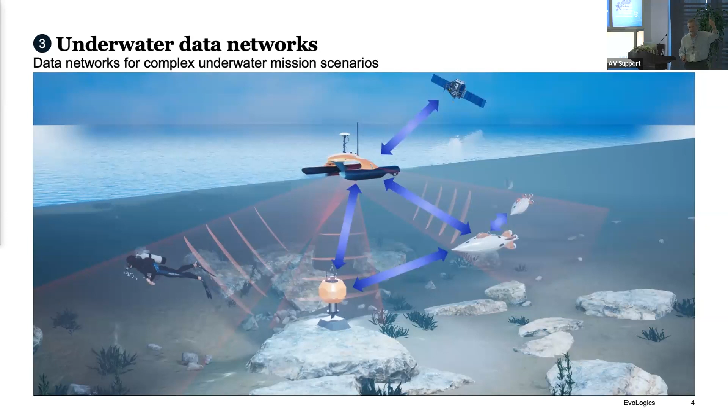We have a wide range of different modems now. These are commercially available. Many of you know that. They give us a possibility to interconnect robots underwater, stationary systems to surface systems, and we also have a communication system to the satellite, and we can communicate to ships and also divers. So the complete network configuration.

But these modems are becoming more and more clever. We have powerful processors on board, so they can do a lot more jobs. That is a big advantage of these singing modems derived from the dolphins. We call it S2C, sweep spread carrier technology: we can use the same signals with modulations on it for reliable communication and also for positioning. We can measure the travel time with the highest accuracy, and we can do USBL, LBL positioning with that.

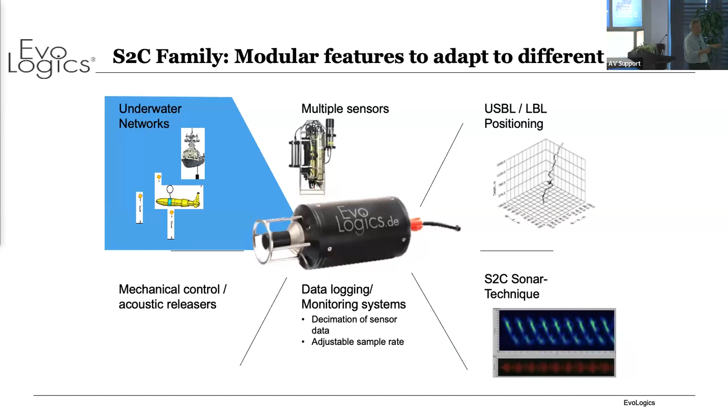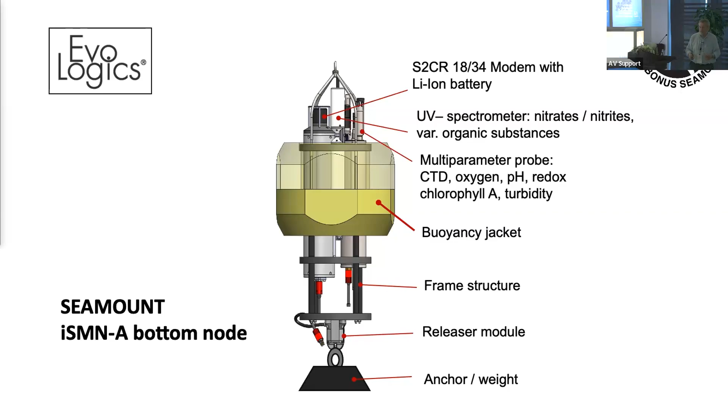We can connect sensors to the data logger. We have a memory on board, mechanical control, and you can set up networks. And with this capability, we said, okay, when we have these LBL beacons for positioning, or USBL positioning, then we can add some sensors. We can integrate CTDs and all these oceanographic sensors, multi-parameter probes, and use them as a multifunctional device. And that is very useful.

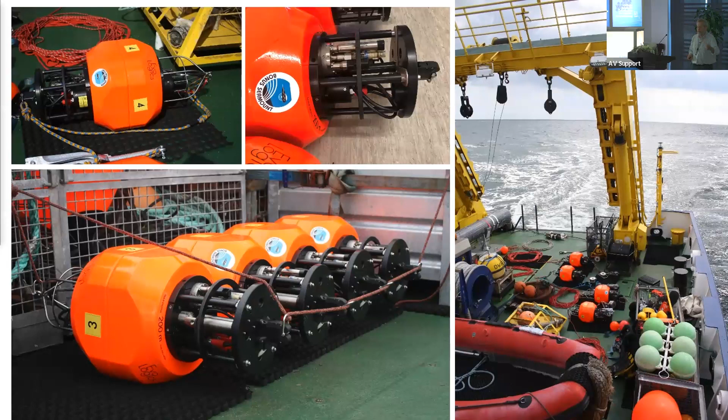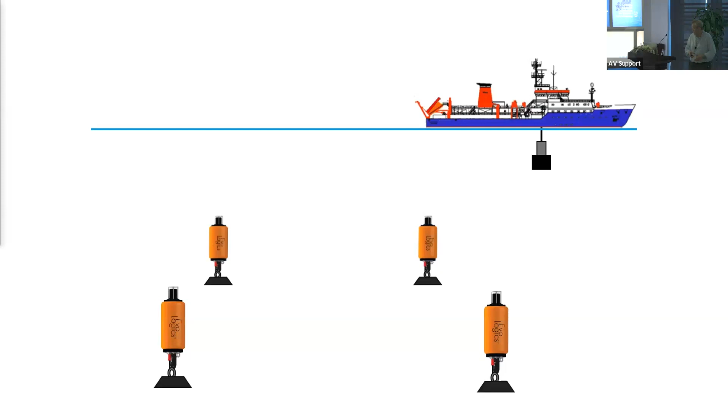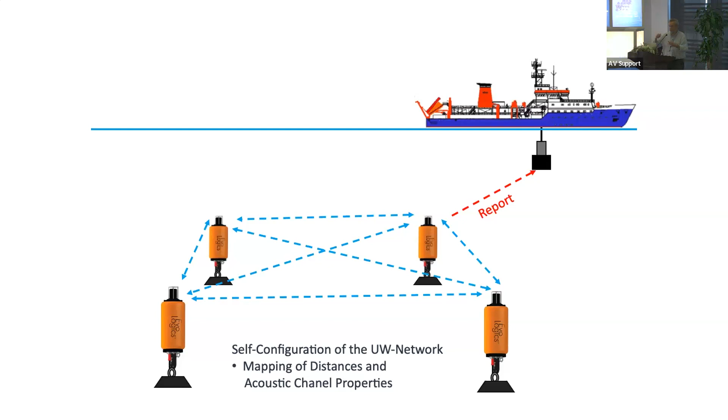That was in a project we called Seamount, to detect sources of fresh water in the ocean, where the water comes out, the springs underground. So these were the beacons for that, and I will show you the deployment scheme. We put a lot of effort into making it intelligent. You can drop these stations to the bottom. Then you can send a trigger signal. They automatically interconnect. They measure the distances between the stations and also the acoustic properties of the channels. And they send you back a report that's shown directly on the map.

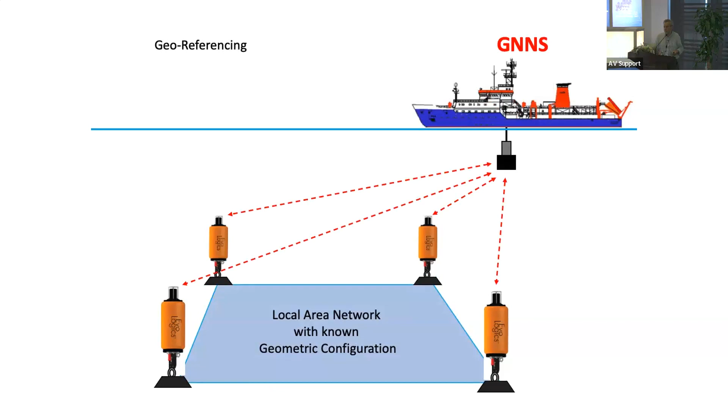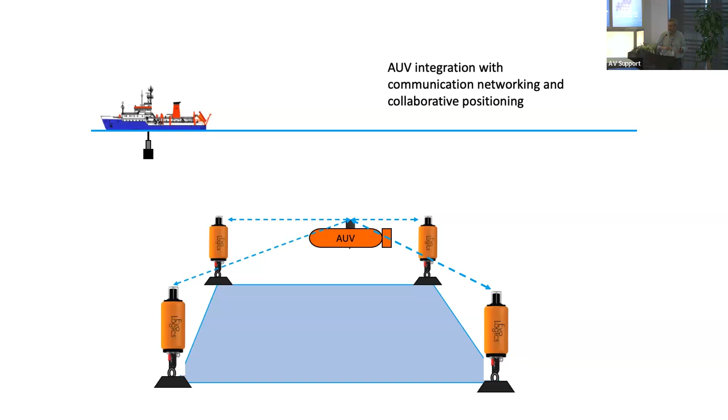And then you have the possibility to use GPS and/or GNSS from different sites, and you can have an accurately geo-referenced operation area. That can be a large area with many stations. In that area, you can operate AUVs, ROVs, whatever you like, divers, and have a very accurate positioning, to decimeter accuracy. Theoretically 1 centimeter, but in practice that is not always so. And not only inside the area, but also in the acoustic reach of that area.

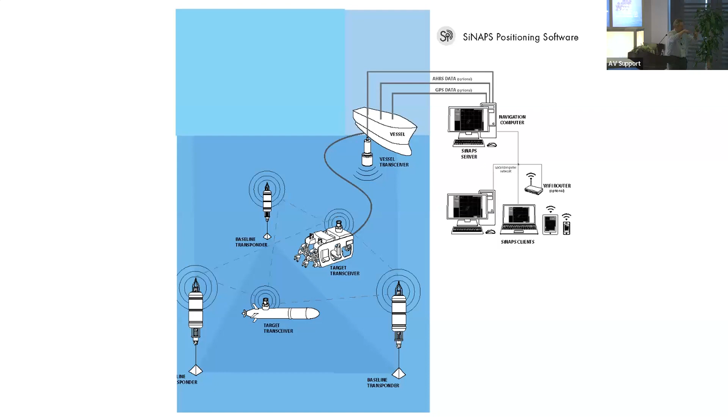So there is special software for that developed together with Antonio Pascoal and other guys from Portugal, from Spain, from Italy. I must say there's a very powerful cooperation in Europe, many projects also with Norway and others, to make these systems more and more intelligent. We can set up huge underwater networks with integrated sensors of different kinds.

And also for coral reefs, we had a question from the seismic guys: can we put seismic nodes in a coral reef? So, hey, guys, what do we want to shoot there? But anyway, we were thinking how to organize it. There are so many points there. And we said, okay, we can cluster. If we put clusters together and a buoy on top, then we can manage this problem with the data transfer. And that might be also interesting for coral reef monitoring.

We can have different configurations of these networks. The simple thing is just data hopping to have a longer range. Then we can have a star configuration. We can have adaptive paths or collective waves and a mixed configuration. And what I wanted to show you today, most interesting, is also the swarm operation.

Because here we were working together. Antonio Pascoal did not show this part of the video, and the WiMUST project that was about these streamers: to replace the streamers by a group of cheap AUVs carrying short antennas with these hydrophones, and the beauty with that is that the antenna is adaptive and you can navigate it close to the ground. Of course, you can do a lot of other things with it. Military people had an eye on it. But I think for monitoring purposes, it's a fantastic technology.

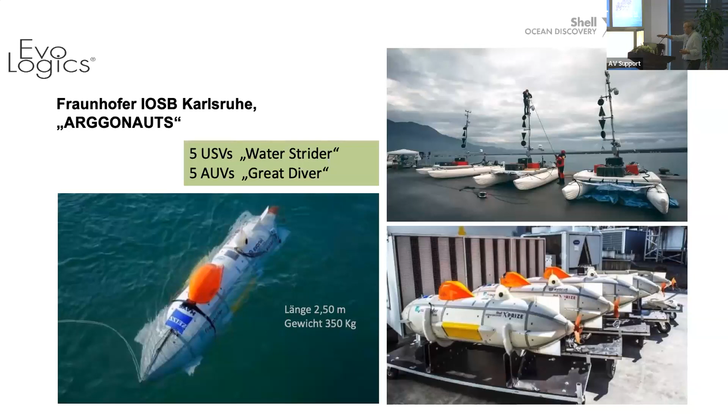The Germans had 5 of these great divers and unmanned surface vehicles, which were inflatable catamarans. Their task was to carry the AUV to the area of operation, no people allowed in that area, and then to start and support the ship. The question is how to organize underwater positioning at that depth. The normal USBL method is you send a signal, you get a response back, you measure the travel time and also the direction, and then you bring the position down. So it's 2 times the whole path.

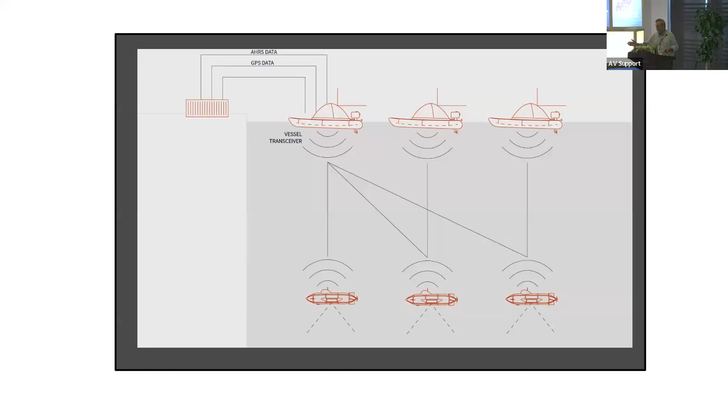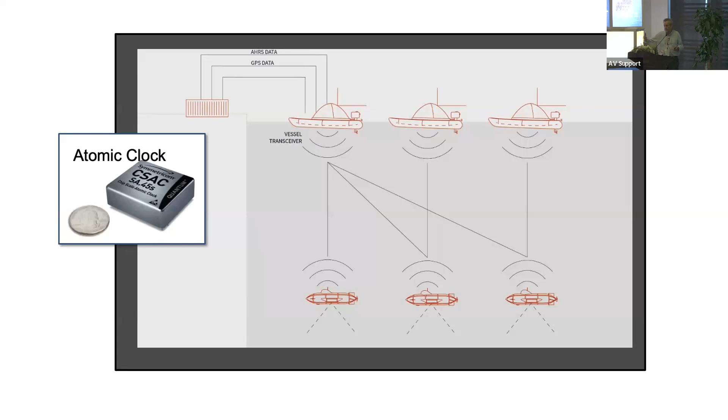We said no, with Antonio Pascoal again. I must say, very good cooperation. He mentioned that before, that is why I come back to that. We can use an atomic clock. We can synchronize the whole network, and then we can just broadcast signals from the surface, and all vehicles in the depth will listen to it. They get the GPS time and the position of the ship on the surface. So all these can give the positioning, and the maximum repetition rate we estimated is 8 times per second, with very high accuracy. But in practice, maybe 1 or 2 times a second. So a very powerful development.

The other thing is our own development of smart robots. So I want to show you my favorite, of course.

Hey, why doesn't that start? See the same problem with that? They should work automatically. But it seems to be the computer. I told Antonio that it can't be. Hey, wake up. Do we have a special trick for that? Yeah, I'm trying. It's me, so that's a problem. Oh, I wanted to show you this marvelous. No, I have integrated it. I will try the next one. Maybe that works. Okay, that is working.

Unfortunately, that was much more beautiful in the basin when we had it still on the cable; it was more gentle in the basin. This is to show that the manta ray with these flexible wings can go very close to the ground, can do a very nice operation, can have the wings stable, as a control surface and sensor surface. It can operate close to the ground. And it has additionally jet engines here.

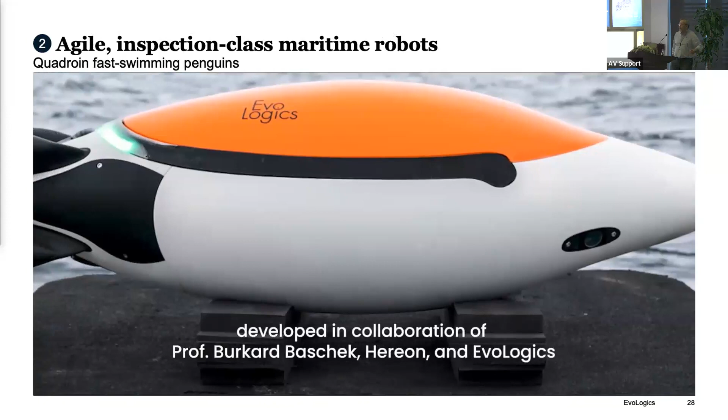Okay, and they can cooperate also with divers. So we have a heterogeneous swarm with a man involved, with manta rays, working together. I wanted to show you this, and this is another of my favorite animals. This is derived from the penguin.

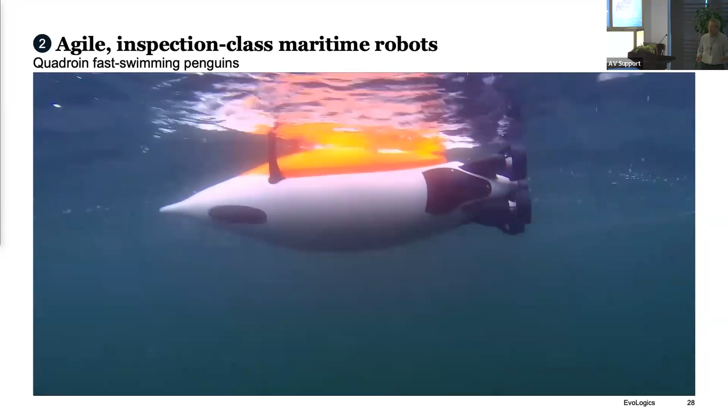Penguins: 40 million years of evolution under the most extreme conditions of the earth have shaped these animals to the extreme. Their drag coefficient, their body drag, is 20 to 30% lower than in any robot, any torpedo or rocket ever built by engineers. Don't believe that you have friends when you are bringing those results. Where did you measure this? Where are you coming from? But it is fact; only after we had repeated the measurements in the US did they start to believe. But this is nature, and we can build those things.

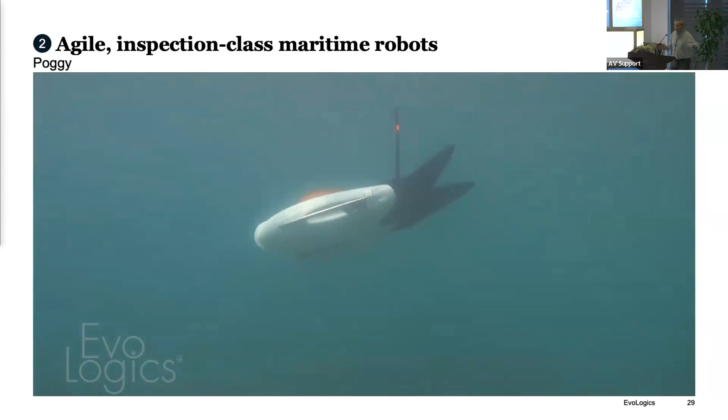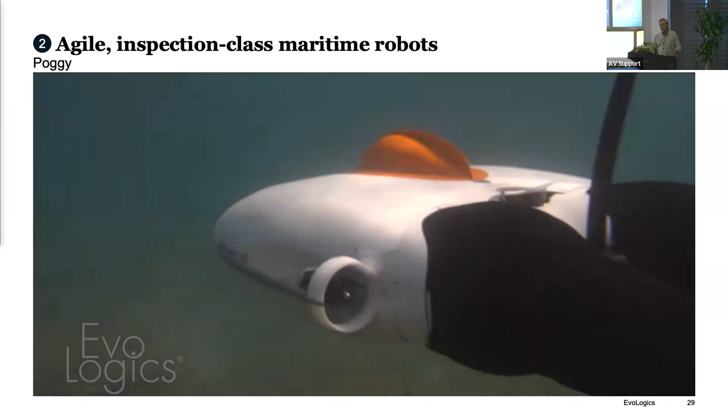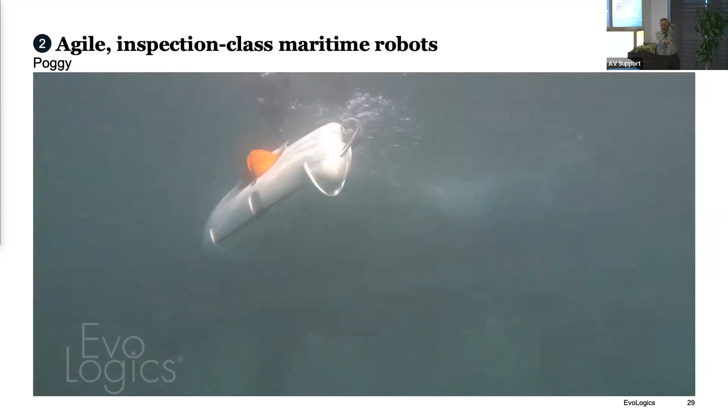And this is our Poggy, the small whale, derived actually from the manta rays. That is the trunk section of the manta rays. Some people were in doubt over the wings. Why do we need the wings? I said, okay, we can replace the side sections by conventional thrusters, but in this case we have a double tail. Look at this nice performance. It can change the angle and can fly at any angle. You can adjust horizontally and turn around.

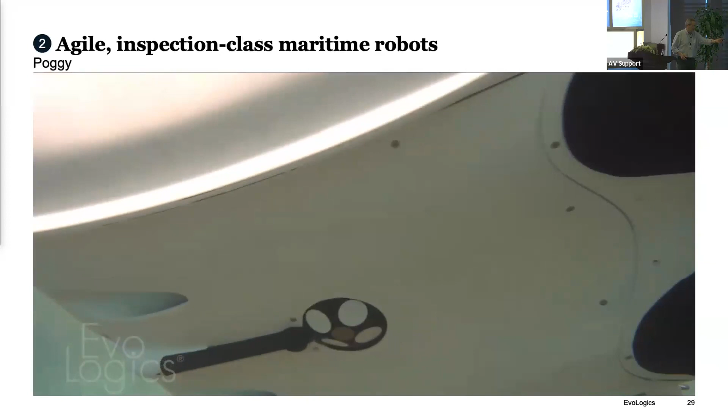Highly flexible. You see they have the DVL here. We have a lot of sensors integrated, and so they are well prepared for most of the oceanographic measurements. We have side scan sonars, high resolution stereo cameras on board, and we have these oceanographic sensors, so it's full of sensors.

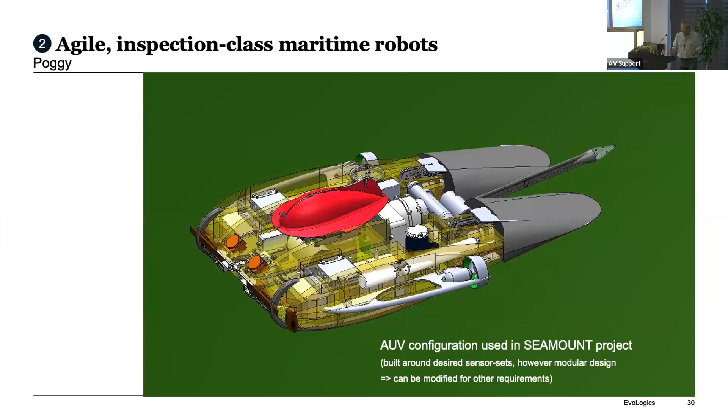And the idea is to have the most compact form. All robots should fit into the back compartment of a conventional car. No extra logistics, no cranes and those things, one or two people for a deployment. But the problem is with all these sensors, they get higher resolution, 4K, and now people are dreaming about 8K, and what to do with the data. The problem is the acoustic link has a very limited bandwidth, and so we have to do something.

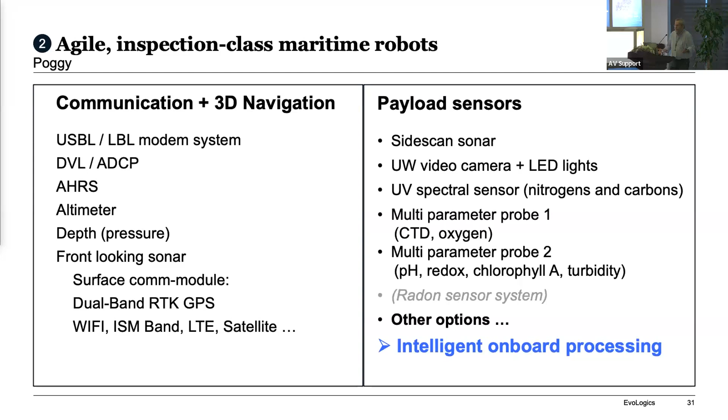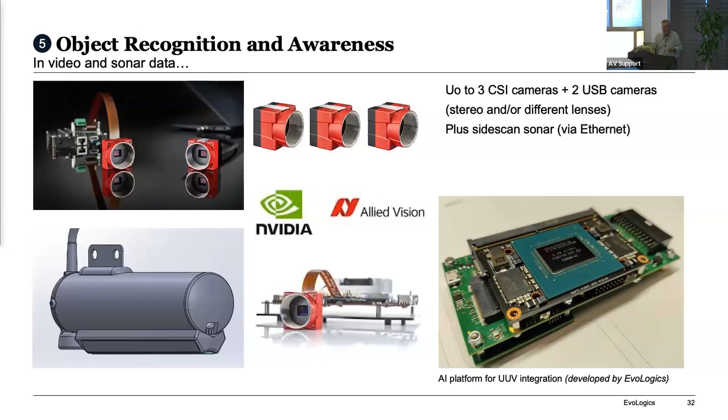And with this large data, we can store them. We can build intelligent data banks and storage. But what we need is intelligent onboard processing. We put a lot of effort in, and this is our artificial intelligence module. That is actually a Jetson board, for those who are interested in the details, combined with interface boards. So we can attach up to 5 high resolution cameras to it, and we can attach all the sonars and other sensors via Ethernet. So this gives us a lot of possibility for multi-sensoric analysis.

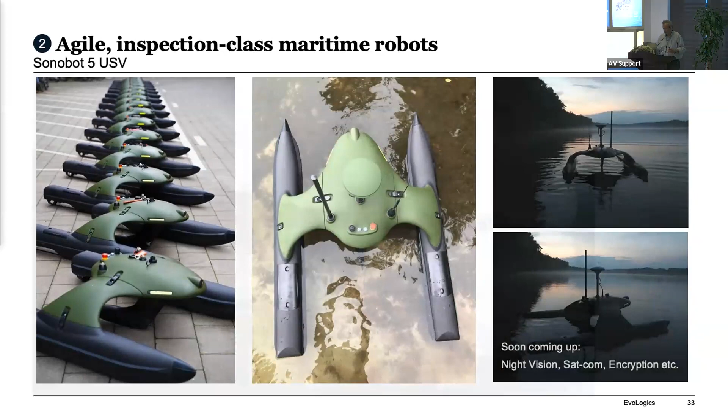And that was of high interest. People from the army are interested in those things, but I wanted to show you the handling. The approach was that one person can handle it. Actually, my sons can put it in the water very easily.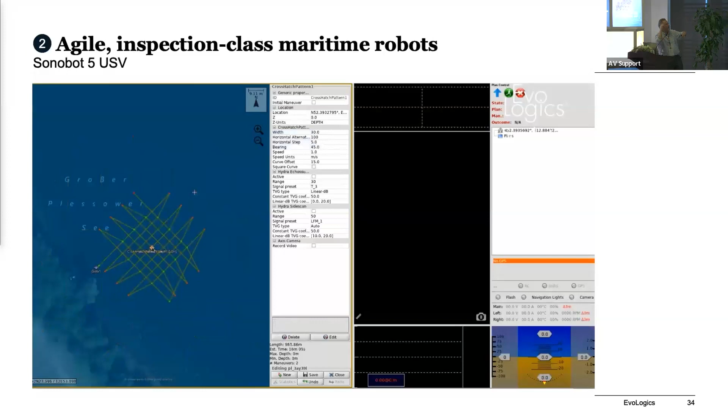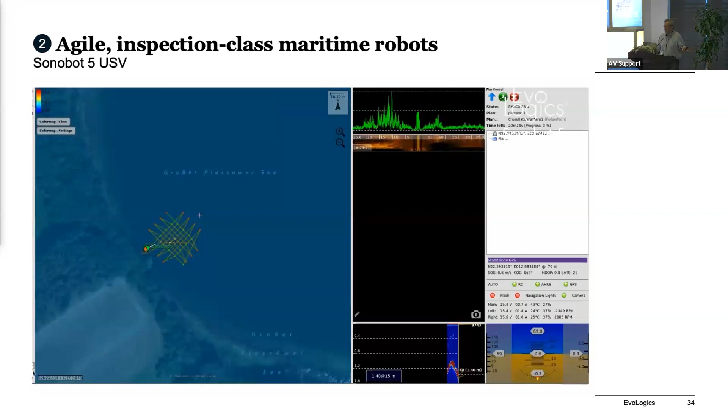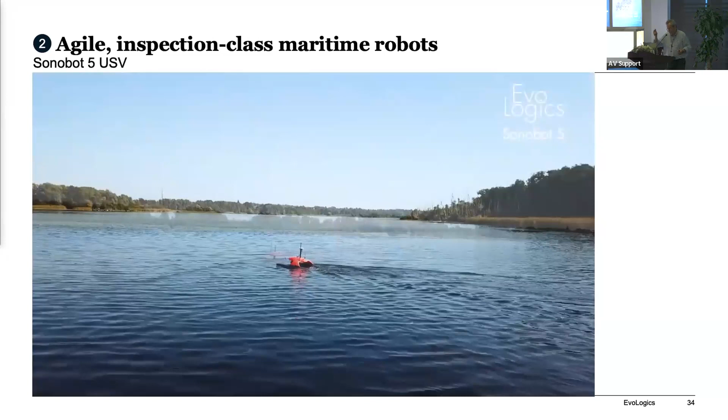And I wanted to show that it also shows the programming. A lot of effort went into the graphical user interface. You can download the map and program the mission. It proposes a grid for the measurement. It's easily adjusted with clicks of the mouse, and your system is ready for the test. And then the robot will follow with high resolution, with GPS with RTK.

And this is the same robot now with the artificial intelligence module. I'll show you some very basics.

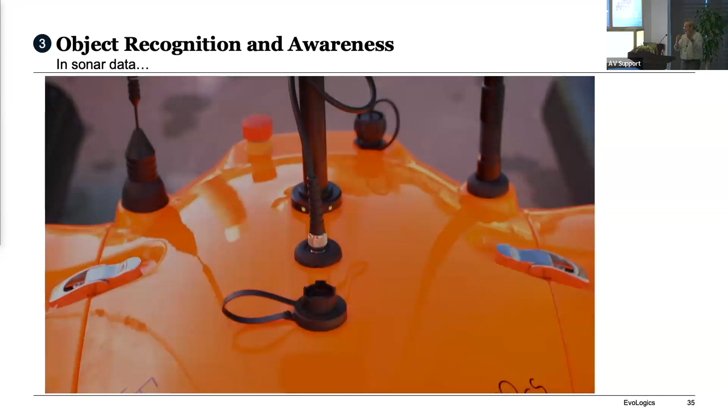These days, maritime robotics serve more and more applications. For many of them, smart functions and intelligent robotic behavior are key to success. To make these robots smarter, the engineers at EvoLogics have developed high-end object recognition technology. It works in real time and automatically reacts to objects in sonar and video data. It is now available for all of EvoLogics AUVs, ROVs, and USVs.

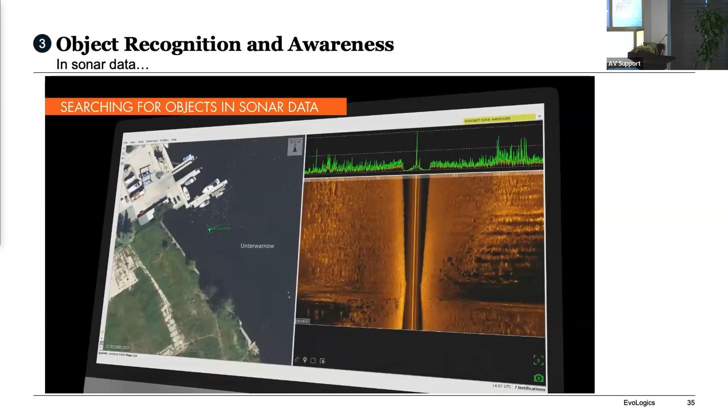There was another ask from the Netherlands police, water police, who wanted us to assist in searching for people underwater. I think we will train our robot accordingly, and what we used to do is dive ourselves and also put the dog in the water.

Very interesting. As a brain guy, I sometimes do not really recognize the possibility is also to train other objects, which is what we are working on now. This is also a separate training of a camera. You have seen those things from other colleagues as well, the excellent work from Woods Hole.

It is not that we have to transmit raw data or compressed data. Even data compression does not help very much. What we have is semantic information compression. The neural network really extracts the information you need. The question you are asking, and it tells you the person is there with a Z position, absolute coordinates, and gives you the absolute time together with it. That is the amount of data you can easily transmit and easily show on your screen.

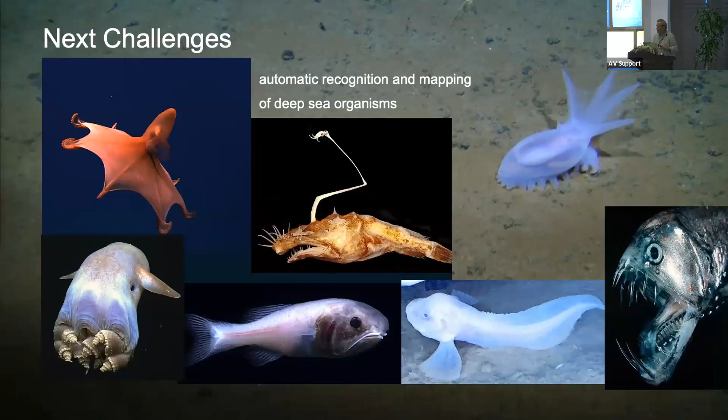But we have contact with the guys working there from the Geomar Institute in Germany, and also BGR, the Bundesamt für Geowissenschaften und Rohstoffe in Hanover. And they provide us video and photo material so we can train our networks. We can also look for minerals underwater and train the devices, or let's say the artificial intelligence module.

The beauty with that is we can train this module on any platform, and then we can transfer the programs, and all other robots will be trained in the same way, if you are using the same sensor set. That's another interesting aspect of standardization, to bring these sensors together, to use a standard, something that comes out of one box.

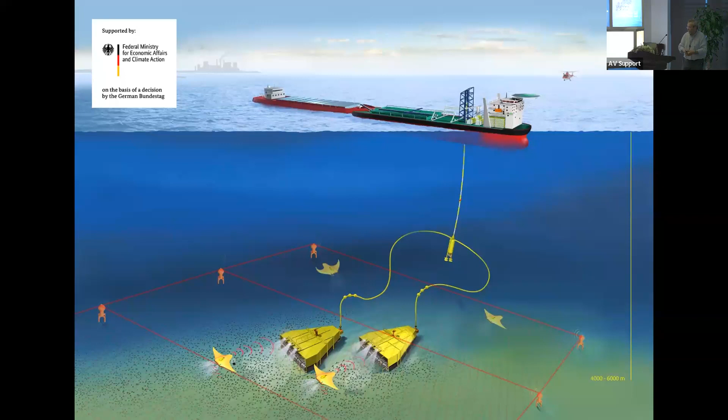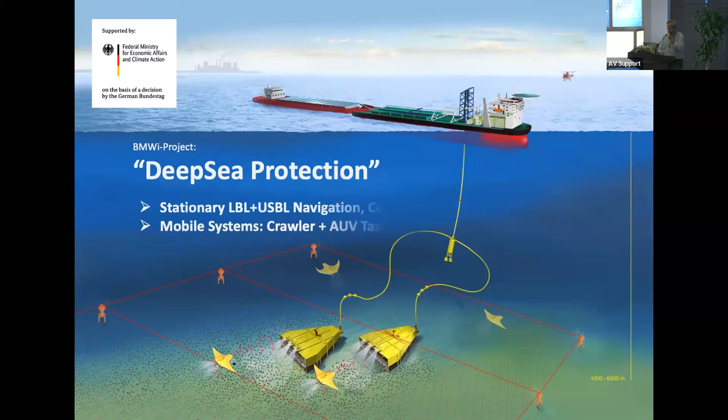So we have a project here in Germany called Deep Sea Protection, for manganese nodule mining. The idea is that we have a combination of a stationary network. You need anyway beacons around it for positioning. In the deep sea, it goes to 6,000 meter depths.

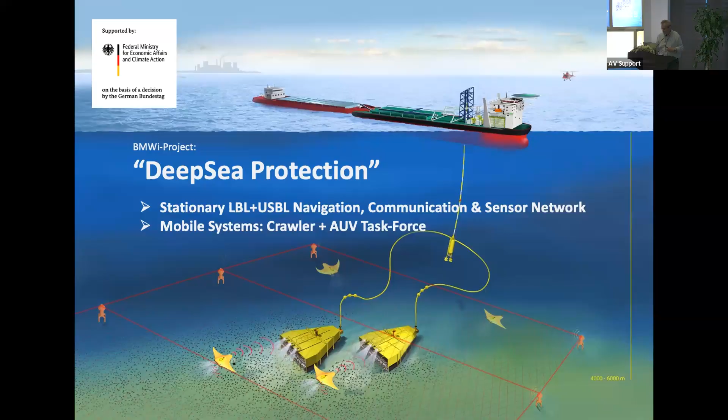And we want to integrate a task force of AUVs, in this case maybe mantas or poggies, doesn't matter. And they should be resident on the crawler. The crawler is interesting. You have a cable, the umbilical, a glass fiber cable to the surface, and you have a power supply.

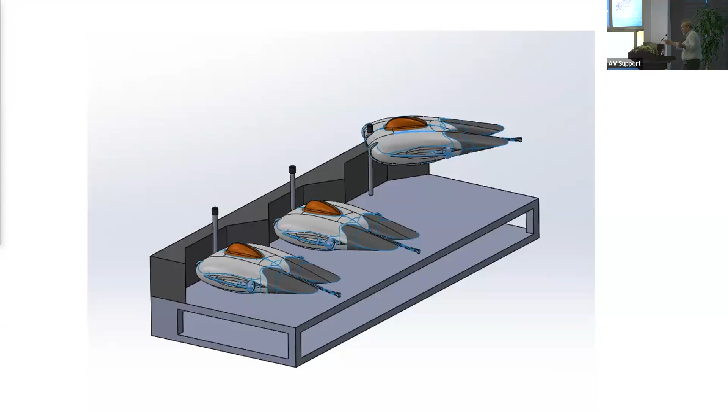And so we can utilize that. We can have the beacons with vertical probes for profiling, or we can make the AUVs resident, either the crawler itself or just a power bank, and so we will be fully independent. We do not need to blow them up with big batteries, because then you need the syntactic foam and the whole thing becomes bigger and bigger. No, we can reduce it. Say, okay, we put the limitation, 10 hours work is okay, and then come back, recharge, exchange data, get the new program, new option.

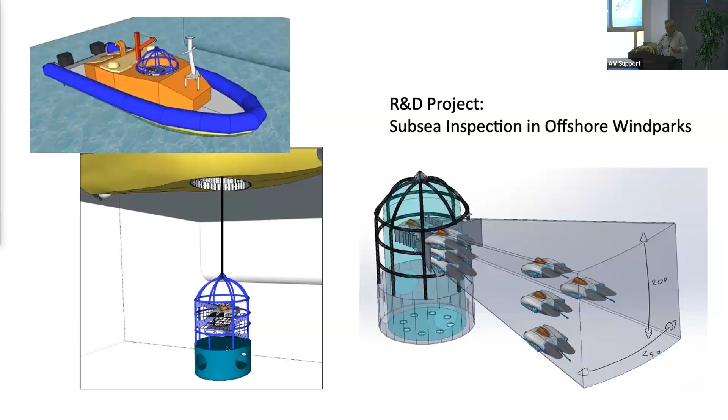Or another option is to use this for wind power, wind park inspection, a new development now with the shipbuilders together. They said, okay, we can have a huge moon pool, we put a basket in, and please make your AUVs fly in.

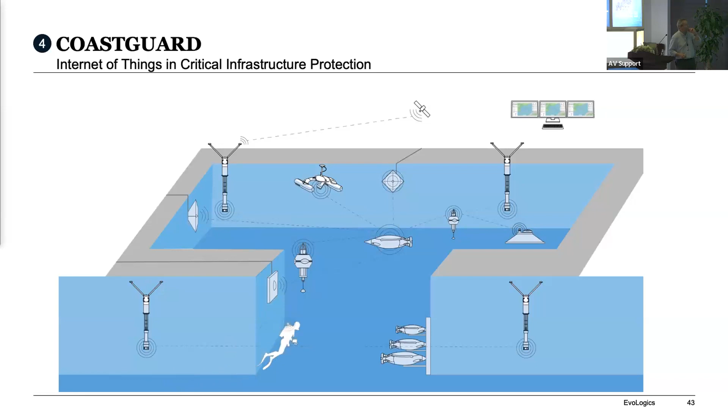And the other thing is there's a very good synergy, very close to the questions of critical infrastructure protection. So in harbors and other crucial areas, we can use resident AUVs. We can use surface vehicles like these sonobots. We can have complete networks. Recently, what is the state of the art? They have single sensors for diver detection, for example, but we can use complete networks, and nobody will sit there the whole day around, 24 hours, 7 days, watching a TV or listening to a sonar, a diver detecting sonar.

So that should be done by a neuronal network. And the other thing is maybe we need to add some sensors.

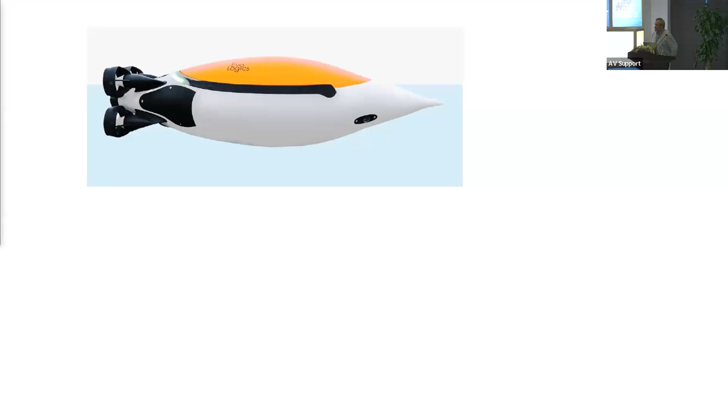These penguins will be available, I hope, next month. They'll come out of the shell and onto the market. But for the security aspects, it would be nice to have another sensor. We said, okay, we can add a 3D fluxgate magnetometer.

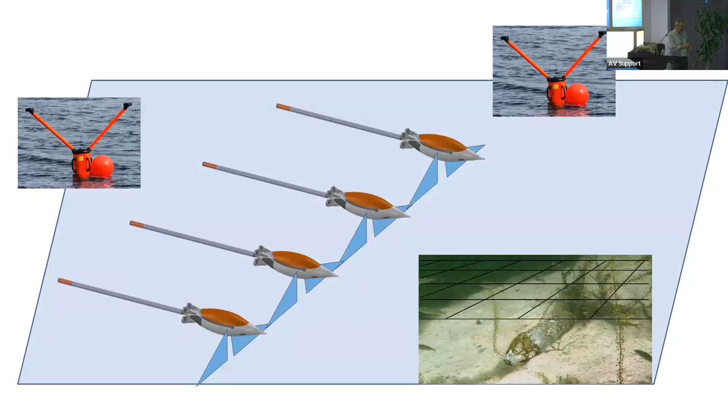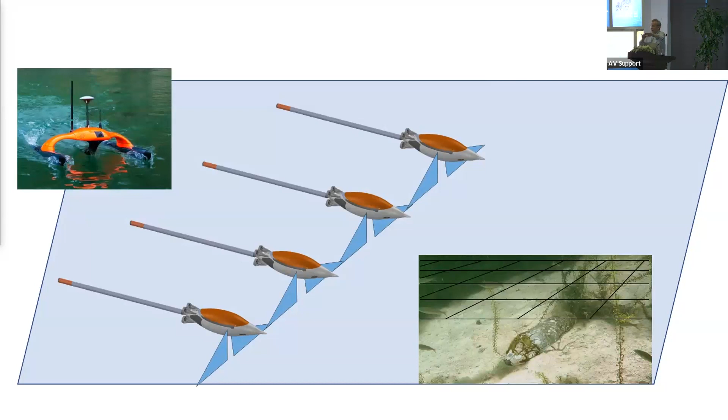And we can operate them in swarms, so we can use these USV AUVs we have here, different constructions, or we can replace them by a sonobot. And so the whole thing will be operable and can be managed from outside.

And the other very interesting aspect, also for ecological monitoring in this security scenario, is that even if you have not trained the object, if you repeat your observation, your monitoring, and superimpose the images from the last time, then we can make the change detection.

Any anomaly, any changes from the last time can be shown directly. That is very important also if you are looking for changes in coral ecology and so on. So a very good similarity.

And what we have also achieved is good progress in diver communication and diver orientation. We have a little handheld device that can be used with a USV's positioning from outside, so the diver will always know where he is.

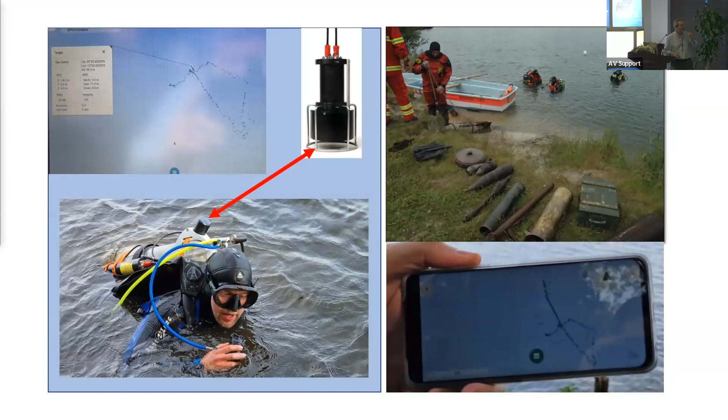So actually there are a lot of challenges in front of us. And what we have heard today, interesting talks and interesting aspects, streams for the future. There are not only challenges, there are also synergies. Please look at what is in the security part, ecology, or deep sea, shallow water.

And if we can build our robots in a pressure-neutral system, no pressure housing, no vessels, so that the electronics itself are sealed, then micro-nano coating will replace these huge titanium and steel vessels. So the technology comes from space research and other areas.

We want to integrate, and we want to invite you to cooperate, because there are so many things in front of us. In the best way, we can develop them together.

And that is actually what I wanted to show you, and why I'm here. I hope that we can assist you, because our commitment is we want to provide you the best technology. And being still a scientist, I must say, we know how much we suffered from the lack of technology.

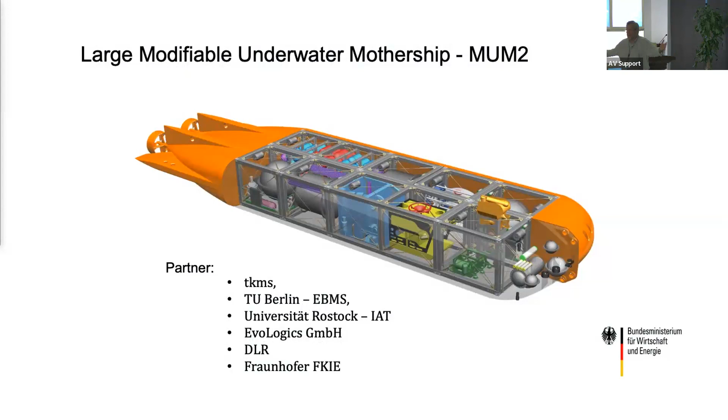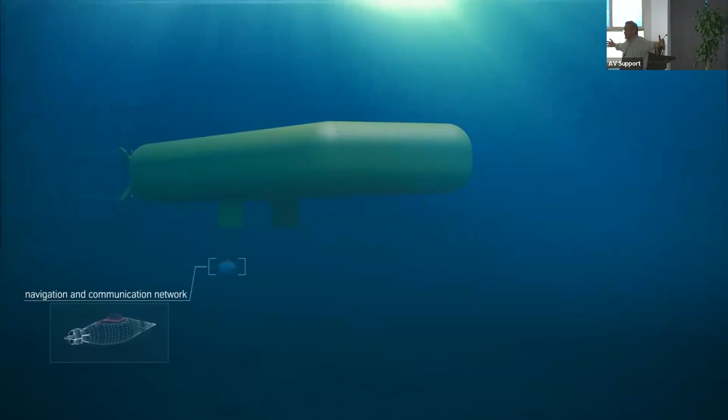In cooperation with its partners, ThyssenKrupp Marine Systems is developing a modular system for an innovative vehicle class to explore and harness the world's oceans. If you want to go for the big, MUM is unmanned and autonomous. Due to its unique benefits, the new vehicle is ideal for industrial use in offshore energy and maritime security, as well as in maritime science.

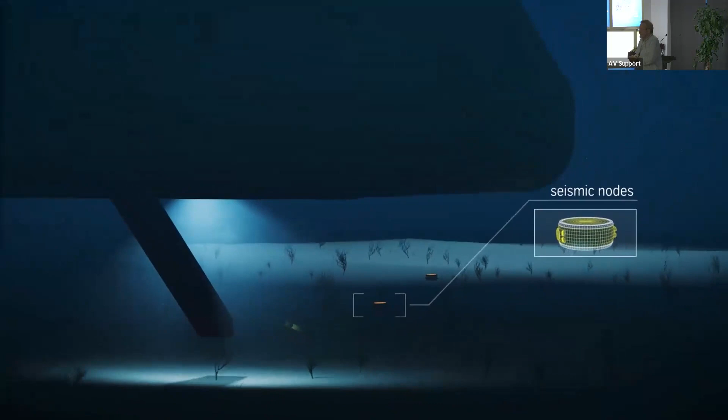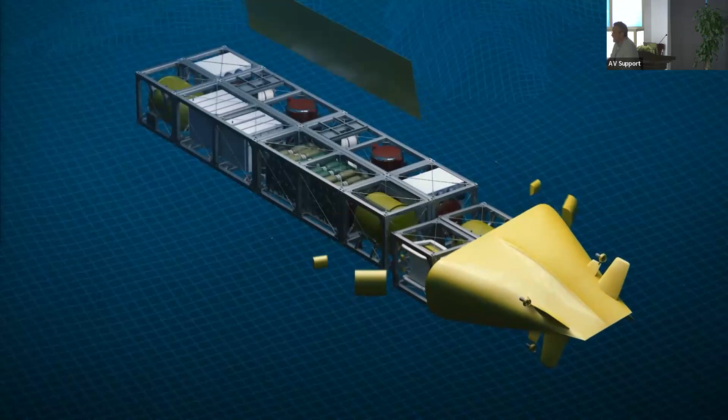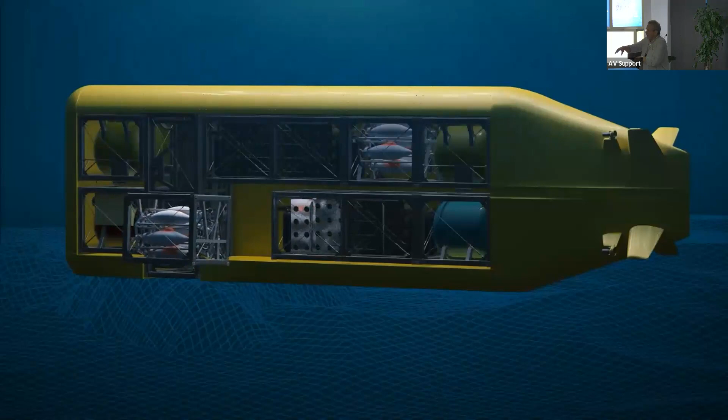In the second stage already of the development, MUM has high availability, as it performs on the bottom of the sea without influences of waves and weather, so that laboratories and universities can have full labs. MUM can be tailored to specific needs. Its modular design enables the new vehicle to be customized for each mission. Variant quantities like fuel can be freely combined with custom mission modules. The final system enables even unusual and highly specialized tasks to be performed efficiently.

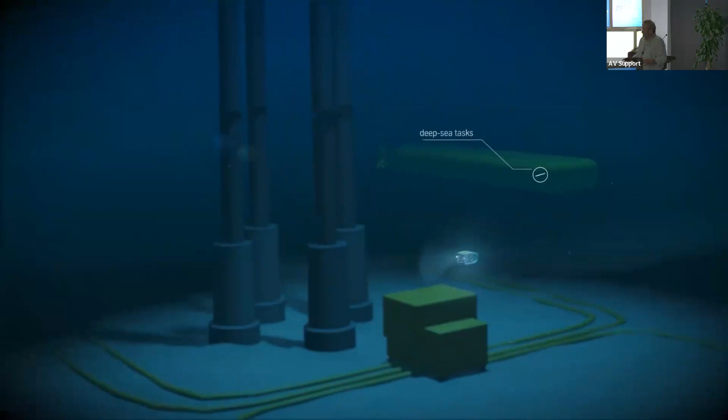And of course we will have our batteries in as a symbiotic system. Possible activities range from payload transportation and operations to research missions and stationary deep-sea tasks. MUM cares for nature. Its emission-free fuel cell energy system makes the underwater vessel ideal for use in highly ecologically sensitive environments. MUM is efficient. Individual modules can be reused, permitting a significant reduction in costs and much quicker development cycles.

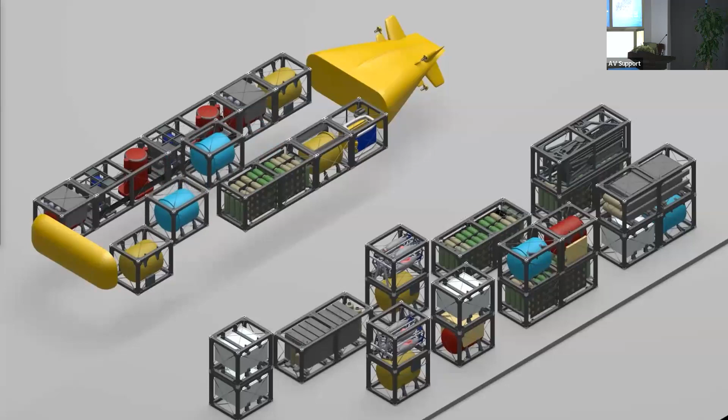Transported as standard containers, individual modules can be assembled to customized vehicles. MUM: one system, multiple configurations, new possibilities. Thank you very much.